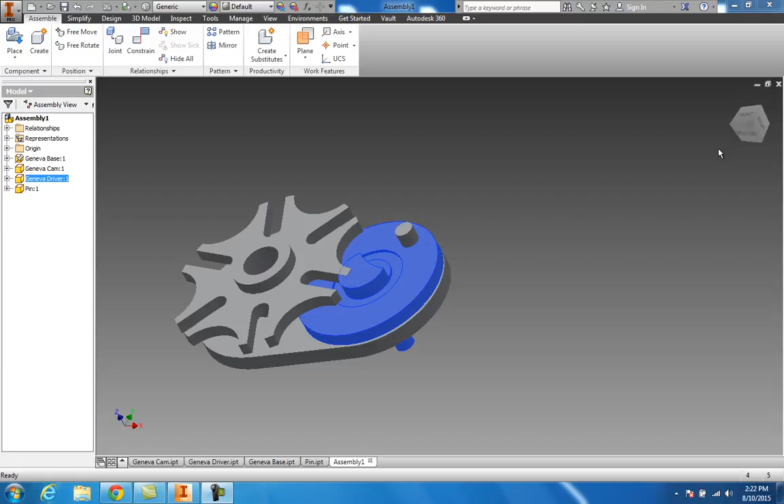Welcome to week 14, and in this week's lesson we're going to get into basic motion. In basic motion you have to have your product assembled, and that's what we got into in the previous classes.

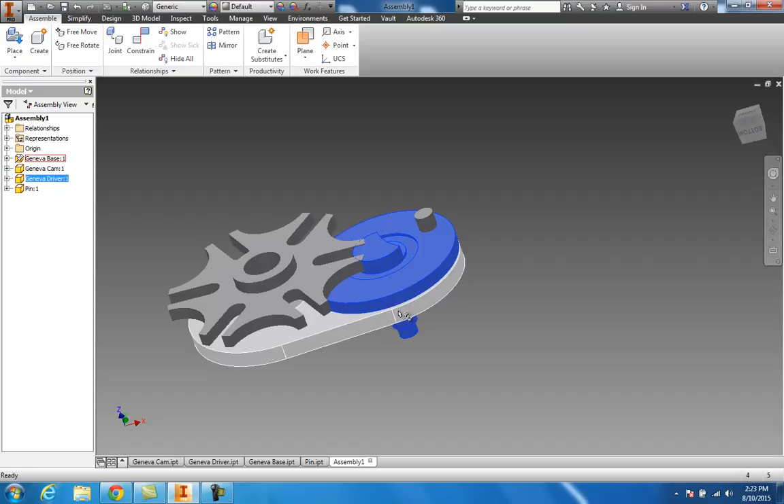But on this one we're actually going to make this thing turn. You can see your part should look like mine right now. You should be able to take and spin it, and it's all locked in. You've got it constrained to this base plate for this Geneva cam. It's spinning really good, and over here on this side it should be mated and constrained to the base plate, and they should be centered up with the holes that were bored into that base plate.

Alright, now I want to show you how to go in and get this thing turning. To do so, the book might show you a little bit different way, but I want to show you a simplified method.

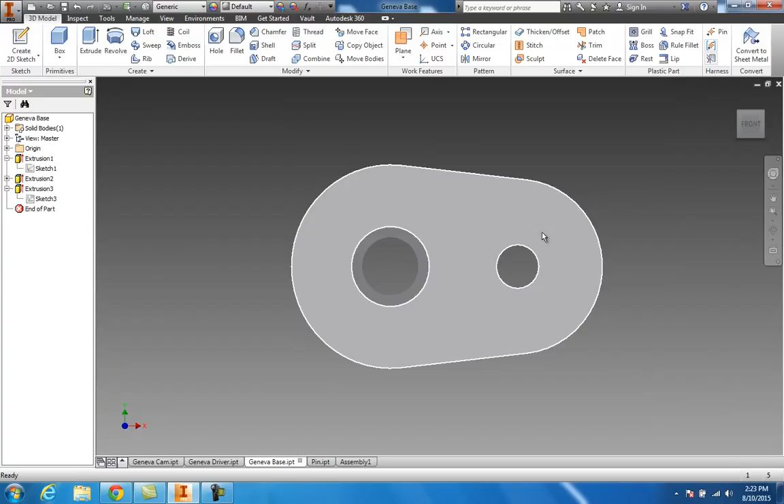First thing I want to do is double click my base plate, and whenever you do that, it allows you to open it up where you can work on it, which is really handy. The only thing I want to do is put a work plane right through the middle of this, and I should already have one set up. And I do - right there should be right in the center of it, my XZ plane. So I want to turn the visibility on that and just take a look at it, and there's my XZ plane. It's already showing.

So now I'm going to go back. I'm going to hit save on this, and I want to go back to my assembly, and you can see it - that base plate right there is its work plane.

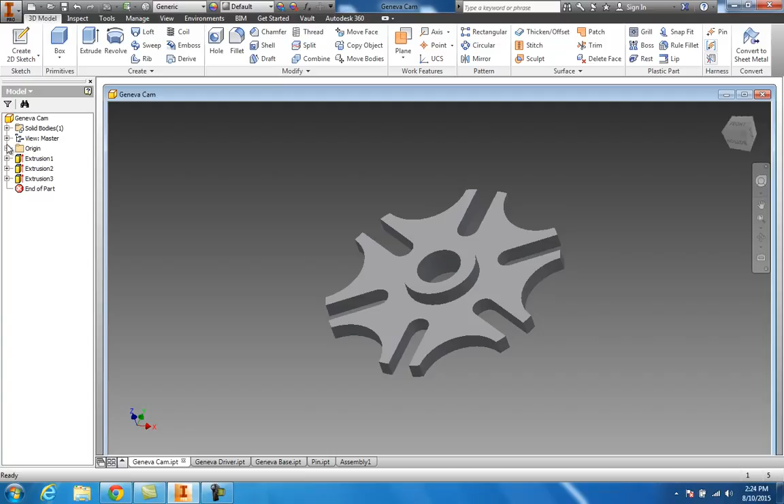Next thing I want to do is kick on the work plane on this Geneva cam right here. I want to get these lined up first, so I just double click on that part, and there it is. I want to put myself a visible work plane. The work plane's already made, it should be, I just want it visible. That's dead in the center, so I just right click on it, go to visibility, click it on. It's on, hit save, and now I can slide down here to this little bar, go back to assembly.

There she is, it's turning and spinning. This one will stay stationary. If you'll notice, I've got my base plate, my Geneva base, I've got it grounded with a little thumbtack in it. So now I want to show you how to get this thing turning by itself.

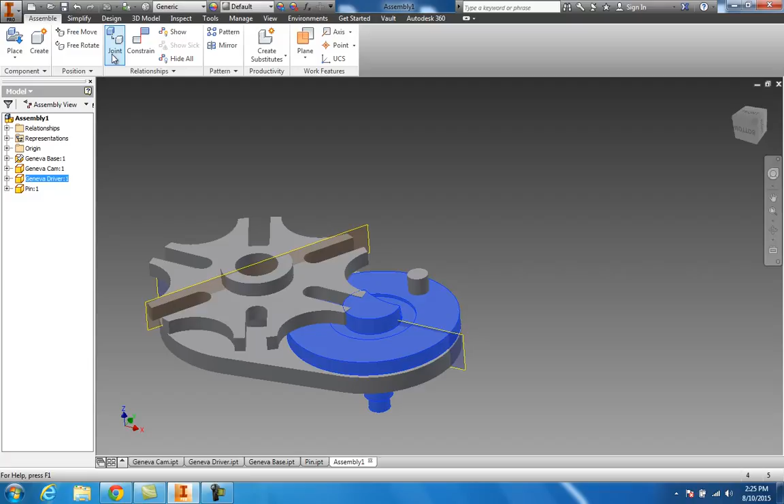To do so, come up here to angle constraint. Remember I showed you earlier you have the mate constraint and you got an insert constraint. You also got an angle constraint that we use quite a bit. Click on that angle constraint, and you want to click on this work plane on this, and then you want to click this work plane for the base twice. And you notice how it lined them up.

That's fine, because I want this groove to be right here, and that's perfect. Apply. So now you'll notice - before I could turn it, but now I can't do anything because I've got it locked into that angle.

Now you can also do this, I want to show you. See that make constraint, the angle constraint we put on there? You can also right click this and suppress it. When you do that, when you suppress it, it unlocks it. You see that? The constraint's still there, but it's just not in usage.

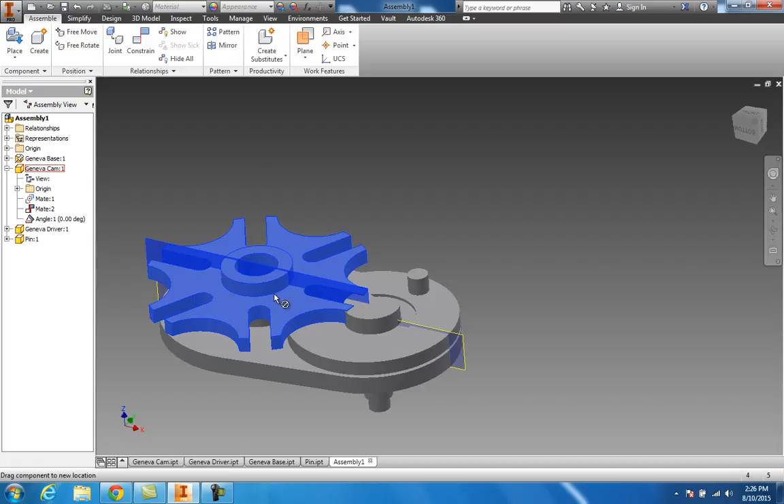Now if you want to go back and reset it back to where it was, just suppress it again, and now it won't move.

Now to get basic motion, it's already set up. All you got to do is right click on top of your angle, and you'll see a drive. You see this drive? Click on it. And basically you start at 0 degrees, and you turn it 360, and then hit play, and there it goes.

And you can do this faster, and there's some extra little things in here to do that with. You can do repetitions, you can do it several times, and then here, this is the actual speed of it. Let's see if that makes any difference. Oh yeah, that's it. Then you've got - you could repeat it 3 times and slow it down where it doesn't look so crazy.

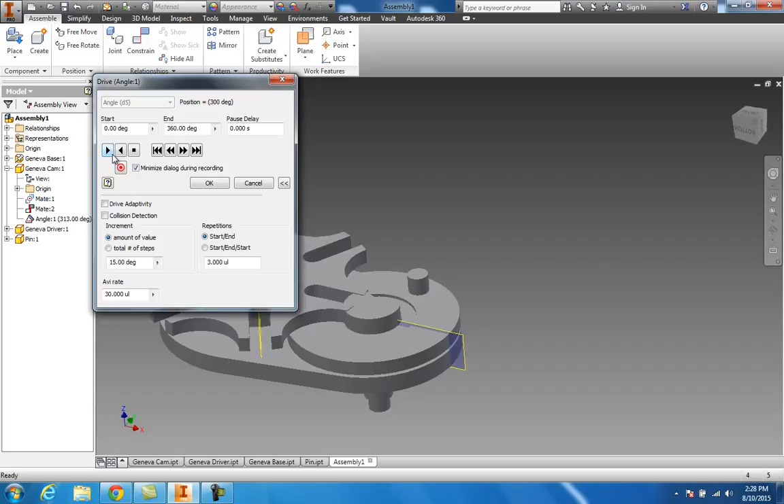So you can actually get this thing to run. However, I want to put this one back on 0. So I just double click it, and put it back to 0. And it goes back to where this is lined up.

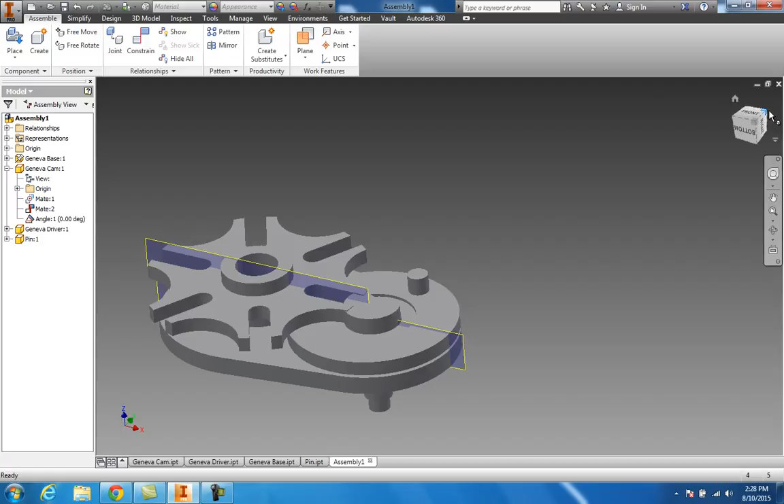If I were to take it and turn it around, it's hard to see - I should have done them in different colors. But anyways, it lines this thing up straight. And what I want to do is get this cam to actually where it's working this. And to do so, I've got to get this thing set up here.

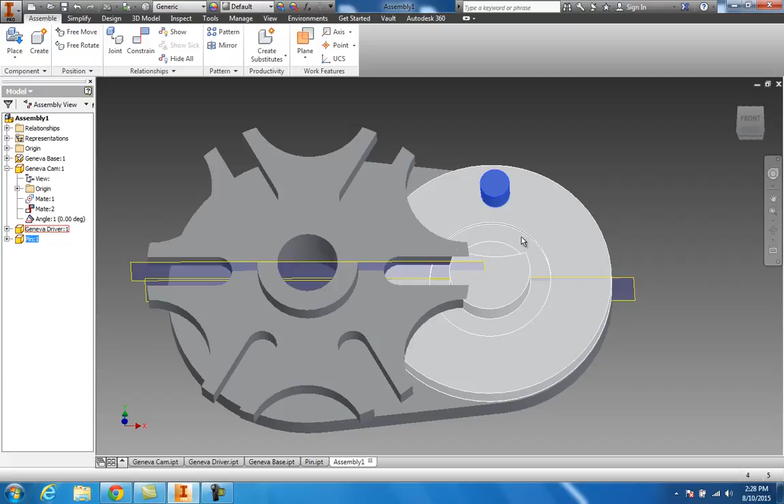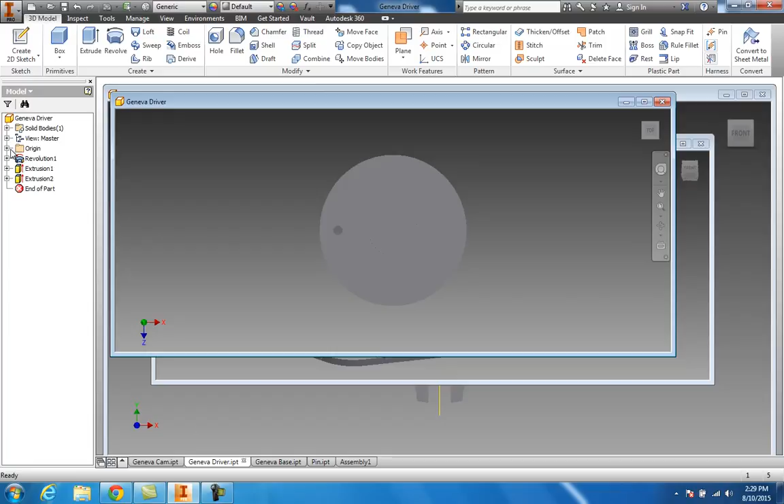I've got to get myself a work plane on it so that I can use it. So I'm going to double click on this, and I want the work plane to come through here from this point because it's going to be in between that groove of that Geneva cam, so it'll turn it. So what I want to do is slide over here and see if there's not one already made. And there it is, perfect. I'm just going to right click, turn my visibility on.

Perfect. I want to hit save on that. And I want to go back to assembly.

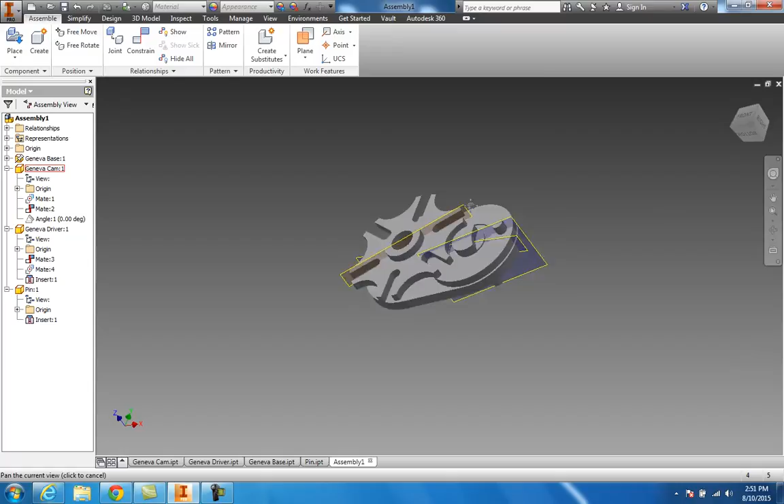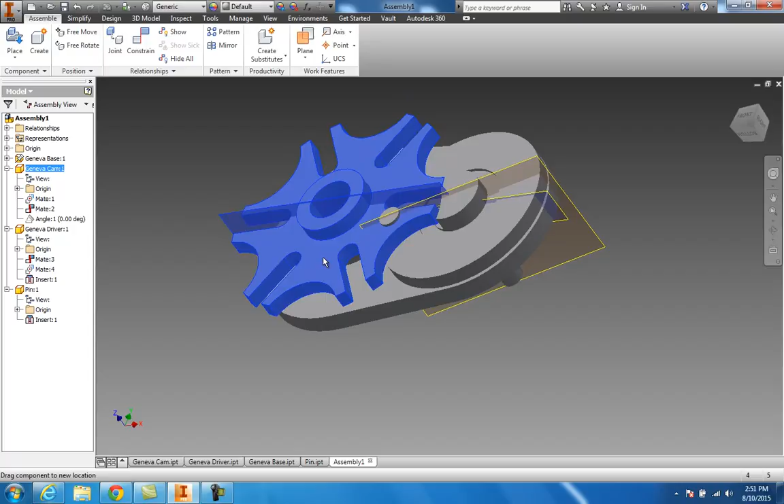Alright, now after we get that work plane in on this, what I want to do is get these meshed up. Right now they're just touching and not actually moving each other. I want to get an angle set on this one to make it my driver, and this one I've already got an angle set to 0, which will keep this thing lined up like this. Now, if we go into contact set, I want to show you how to do that.

You come up here to design, or inspect, I'm sorry, and you've got the Activate Contact Solver, and we'll do that in just a minute. But also the parts that are going to hit, they're actually going to move, you want to find them over here in your browser, in your model browser.

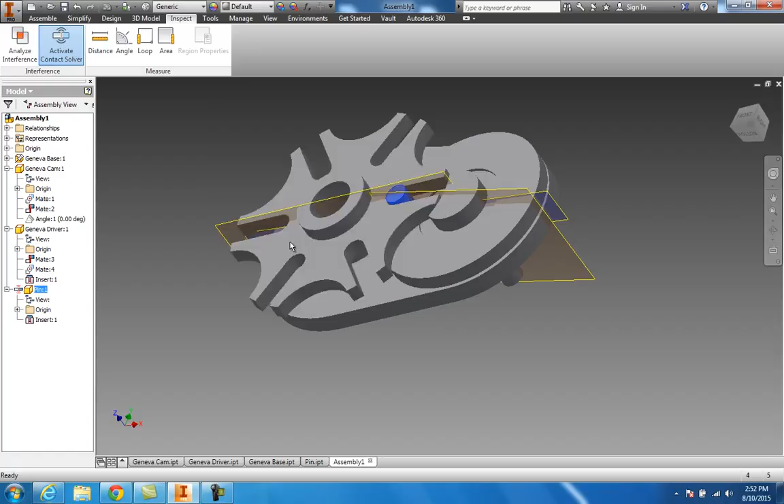And if you look at it, you've got the Geneva driver, right click it, well actually the pin's the only thing touching, so we'll go to pin, right click and go down to contact set, and you see that right there. That means it's contact set. Then come up here to this Geneva cam and do the same thing, right click and go to contact set.

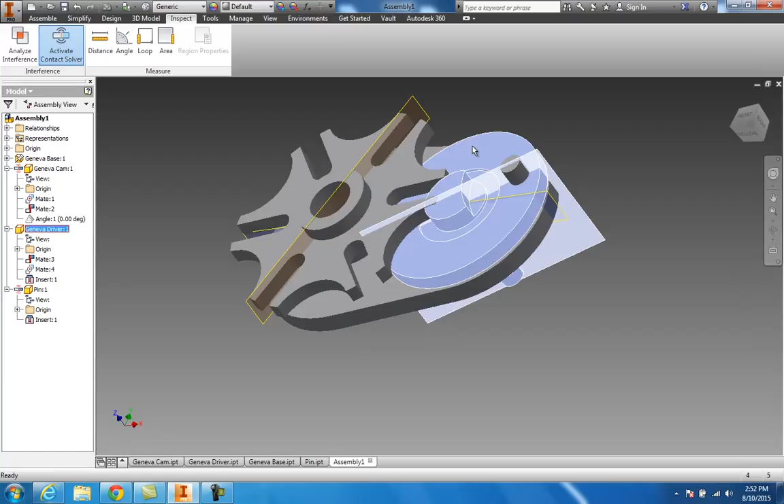Now after you get that in there, check this out, I can grab this driver, and manually I'm doing this by hand, and this is what it's supposed to do. Make sure, if you turn that contact solver off, it won't let it do anything. You have to have it turned on. See, I can't catch nothing there. Well, there it caught it. It kind of slipped back out of it.

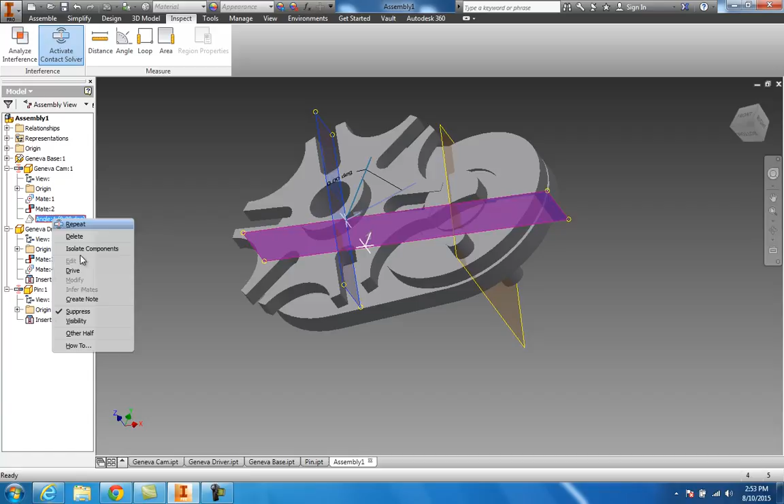Alright, now, and that's what I'm talking about, getting this thing lined up, and we're going to do that real quick. So I want to come back over here to my Geneva cam and make sure that the suppression is off, that way it's locked. Then I want to take this one and set it with an angle constraint as well.

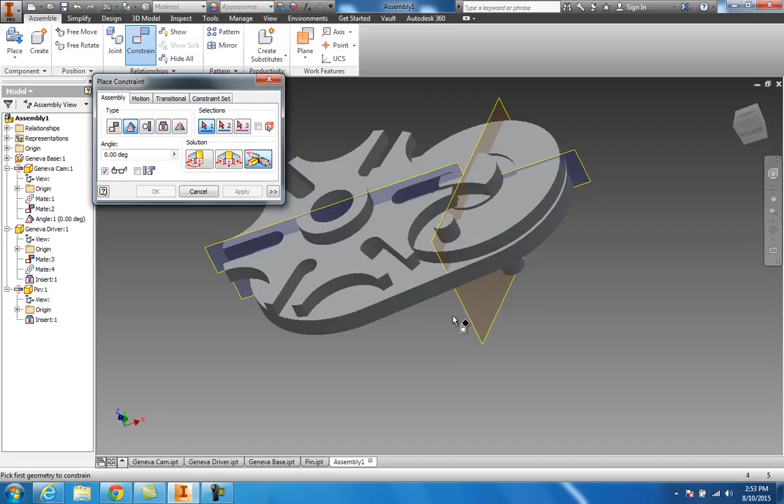So what you want to do is go back to constraint and find yourself an angle constraint. I want to get on this side of the fence. Actually, I can grab this one first, and then I'll grab this side. And one more time. Let's see if I can get that to 180. Perfect. You see how it just turned it around?

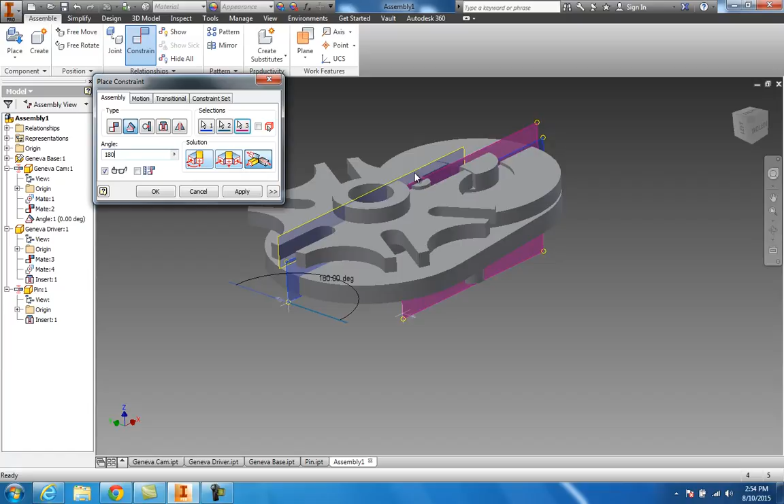Now, if you'll notice something, at this point, all that is lined up. You can't really see it too well like that, but with those constraints, those angle constraints, I've got everything lined up perfectly. Now, all I have to do is turn it on and let it run.

However, to do that, you've got a drive, and if you go over here to your browser, you control all that by getting it to move through the browser, and you do it through the angle. You see you got angle here. If you right click, you got a drive. But this is our driver, so we've got to drive off that pin. So come down here, actually right here it is, off your Geneva driver, and you're going to right click here and hit drive.

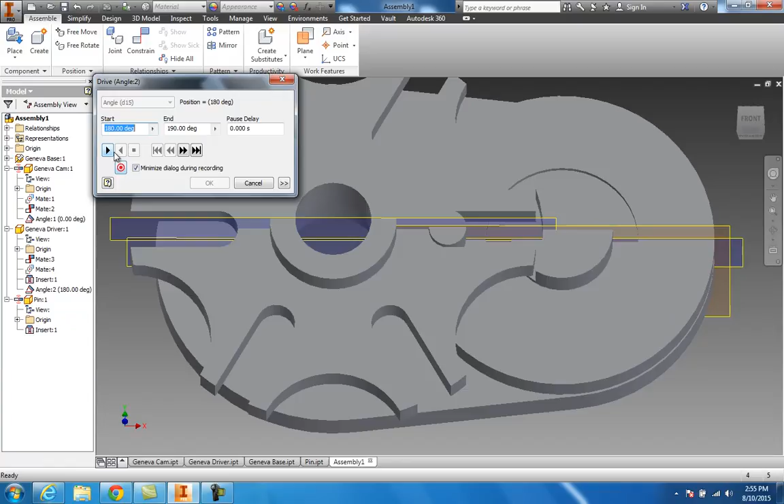But the problem of it is, if I hit that and then hit play, it's not... oh, you've seen it actually try to move a little bit. The reason it didn't move and push this thing was because of one problem, I've got this one constrained right here. This one won't move if you take your cursor and mouse and push down and try to move it, it won't move.

So you've got to get on angle, right click it, and go to suppress. So I've turned that off. Only reason you set this one is so that you can line it up, that's the only reason, then you suppress it. Now I can slide right back down here to this, my driver, right click and drive.

And we'll start at 180 and we'll end. Basically it would be, you're going around 360 degrees. So what you want to do is take 180 and then you're going to add 360 and it'll go back around to that.

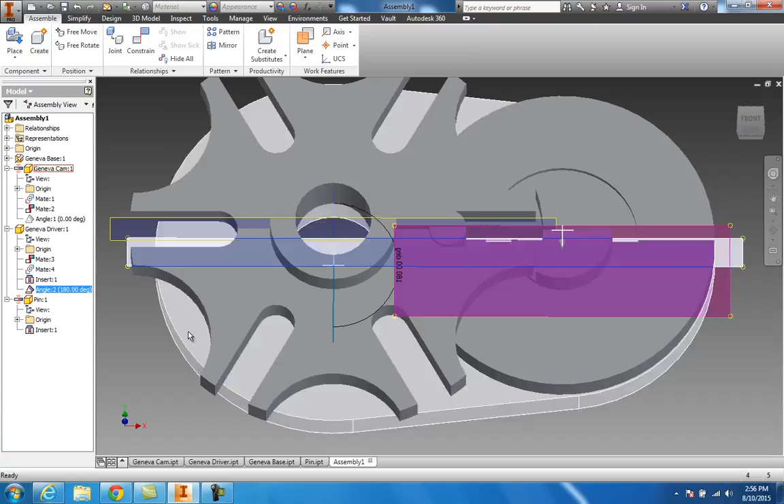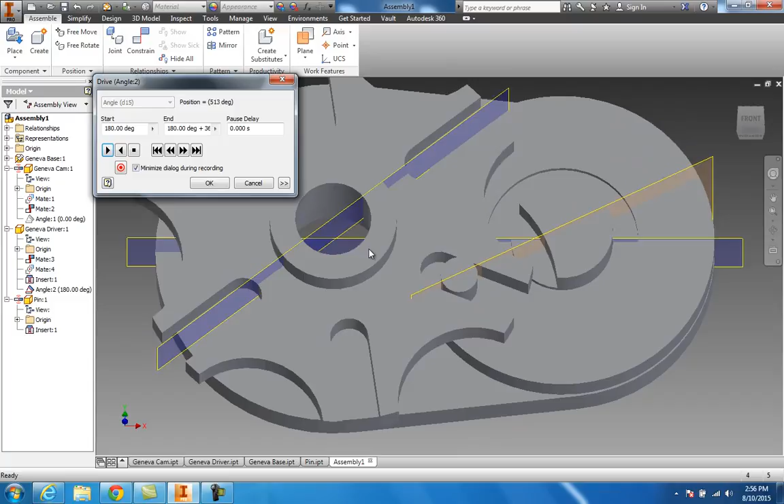Say it's just going 180, or 360 degrees past 180. So it's driving really slow right now. And we can speed that up, of course. Let's see if it catches. There it is, good catch. It's moving just fine. Excellent.

So it went all the way around 360. Now, if you want to add a little bit of speed to this, you can change it right here. We can do maybe 15. Maybe you want to do 2 revolutions with it, that's fine. So kick her on again, a little bit of speed to it. Everything looks great, and basically that's how you do it.

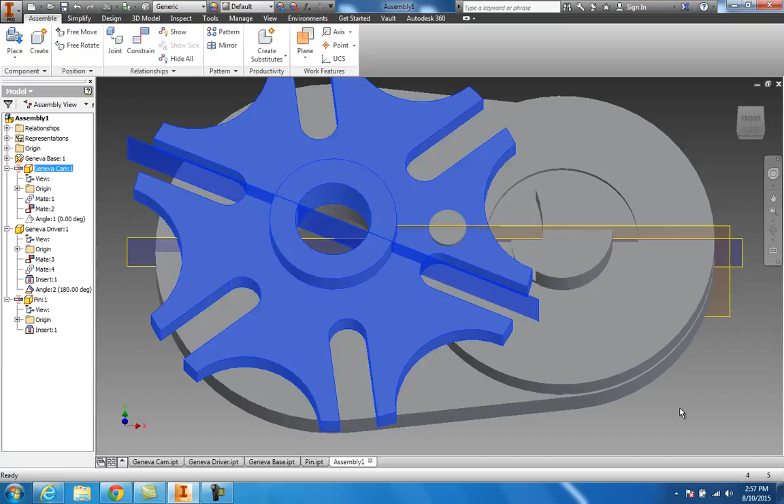Now, for instance, if I do this, if I get in here and move this because it's not locked, well, if I go back to drive and hit play, it can't do it because there's something going on. Okay?

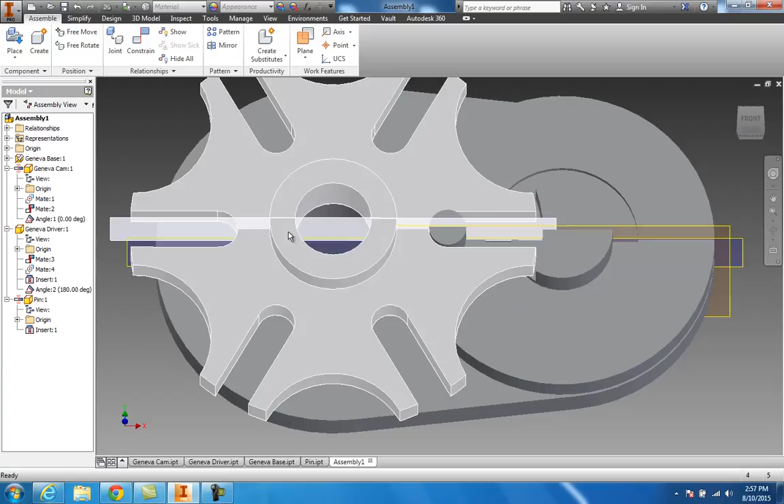So you'll have to go back in there and reset this one back by hitting suppress, unsuppress. It takes it back to its home. And then you go back, then you've got to actually suppress it, and then it frees it up, and then you can go down here and drive.

Just kind of like having a park brake on your car. Doesn't work too good when that park brake's on, does it? You have to unlock it. That's the same way, you're just unlocking this. Everything's moving well, okay? So there's a lot to this. If you have any questions about it, please contact me, and we'll try to work through it.